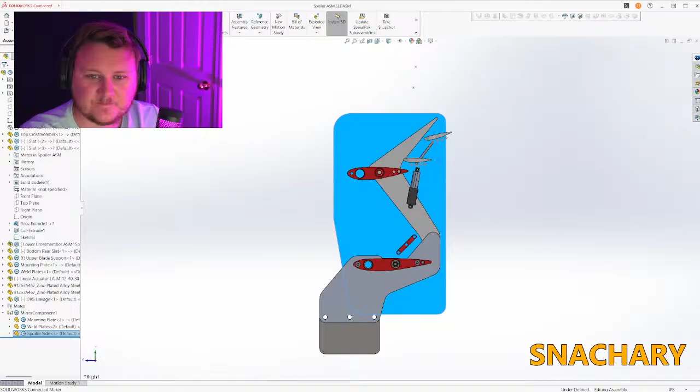Our goal here is to lift and lower these two rear airfoils with this actuator. So over a certain speed they will lay flat, reducing the amount of drag that the spoiler actually puts on the vehicle so that it can...

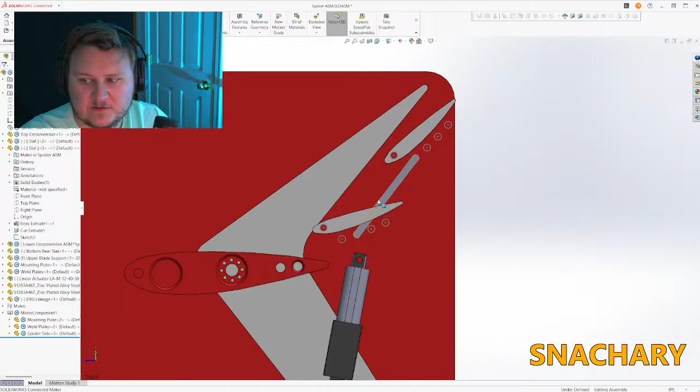So what I'm going to actually do for the real one is replace this with a turnbuckle.

Let's just look real quick. How much would one of those cost? Maybe not a turnbuckle, but actually a turnbuckle might work.

So we're asking this to be 2.5 inches long, clevis to clevis. Oh, the smallest they have is like 8 inches retracted length. Yeah, the one they have is 3 and 3/8.

So we'll just keep working as if that is a turnbuckle. Okay.

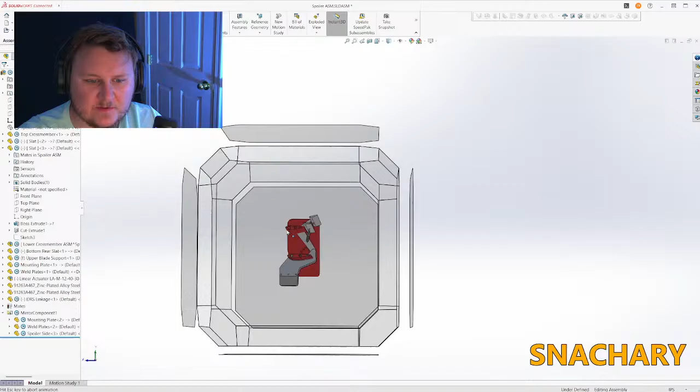So we need to build a tab off of this boomerang piece that will hold this pivot point. We already have the sketch started there with these 2 points, so we'll just convert this.

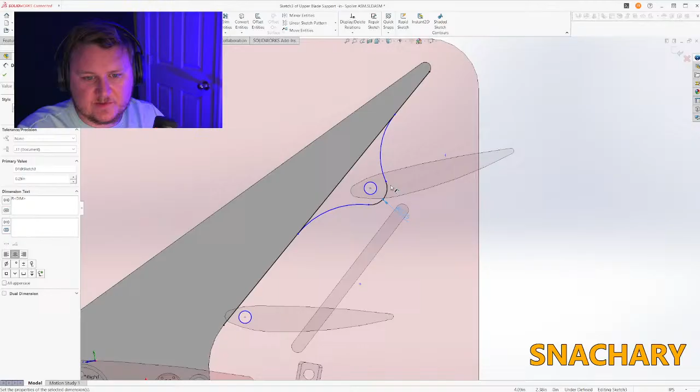We want to fix this one in space, because otherwise it'll move around. So I like that at 0.25. That's pretty good. I do like that at about 1. Don't see why not, we'll make those equal.

And then this pivot point we decided is a 10-32 clearance, which is 195, I believe. Yeah, I think so. Or 191.

Let's add our fillets here. So we're just building up around the pivot point. We're using a lot of the geometry that's already there.

Let's see if we can't just tag that into that. We'll fix this point here too. Since we're already using that, we'll make these 2 hole sizes equal.

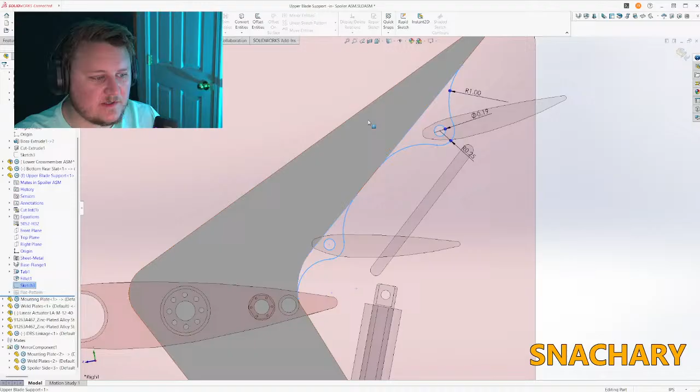Okay, and then we got to go in here and trim parts that are not tabs. So then we can X out of here. We can select this sketch, select the base flange sketch or feature, and it will convert those to tabs.

So boom, we've got a couple of tabs now that our flaps will pivot on. Oh gosh, that's so cool. That is so cool to me.

So obviously we're going to need to add some notches and such, so that these don't interfere. That one's pretty major up at the top. If we cut that much out of it, I guess it'd just be the top side of it, right? Yeah, I guess it would.

One thing, if I get the top 2 pivoting correctly and that all looks good, I might try to tie this bottom one into it as well. So if that were to be the case, the actuator might move.

But for right now, look, I've got the actuator right here. It's tiny, you know, that's nothing. That cross section is not going to end the race. So...

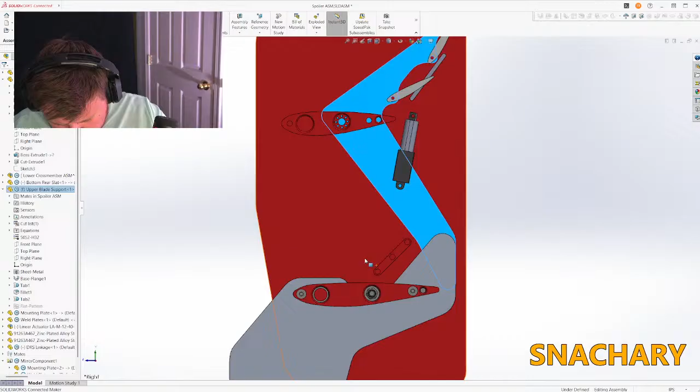It's pretty good, pretty strong. But for now let's keep it simple with the top one. Let's go ahead and build a brace for mounting these two things together. That'll be easy.

So what's the distance between those? 6 inches. I guess we could use more of that 5/16 rod, we're gonna have extra. I think I had to buy 6 footers and I only need 40 inches. So let's do a hole.

Sorry, we are mixing metric and standard hardware. It's just what we do here in the United States. I happen to have a lot of M6, but the hardware store doesn't have metric hardware on hand, and what they do have is way overpriced. Ordering small quantities of metric hardware is ridiculously cost prohibitive, so we get to use what we have in the shop and what the hardware store has.

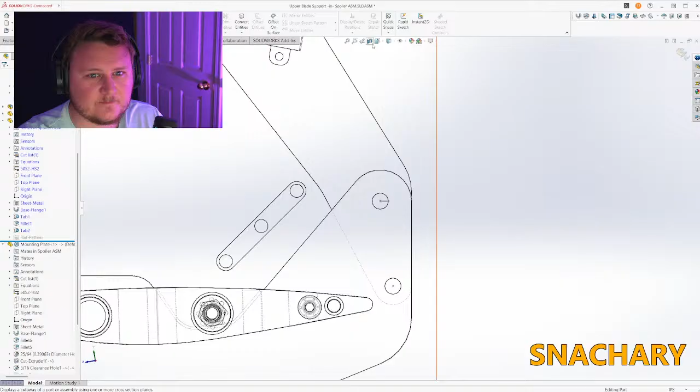We'll throw the same holes in there. And what are we going to call this? The upper blade support.

Yeah, buddy. So now we just need to build some tubes. That's what we need. Just keep it simple. We need to keep rolling. That is exactly 3 inches.

Oh, we've got the clearance for the 5/16 already. We can just steal it from this part.

Last night I watched Mickey 17, which I was really looking forward to based on the trailers, and the movie itself was kind of garbage, which was very disappointing. So I don't know what you guys are doing out there, Hollywood, but if you could be nicer, make better movies, I would appreciate it. Really disappointed.

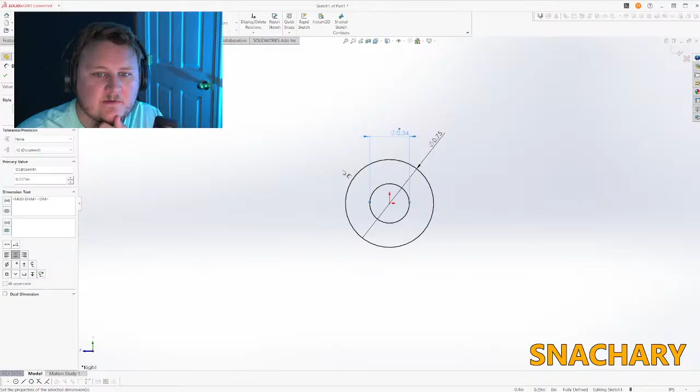You know what I need? This should be a plug, and then we should put the aluminum tube over it. That would be dope. So, give me 1 second.

Okay, so what we're gonna do is... oh shoot, this always happens. We're gonna take the inner diameter of this, which is supposed to be 5/8, but these tubes have been rather inconsistent. So if we do 0.625 minus 0.00125, then make this 3 inches long.

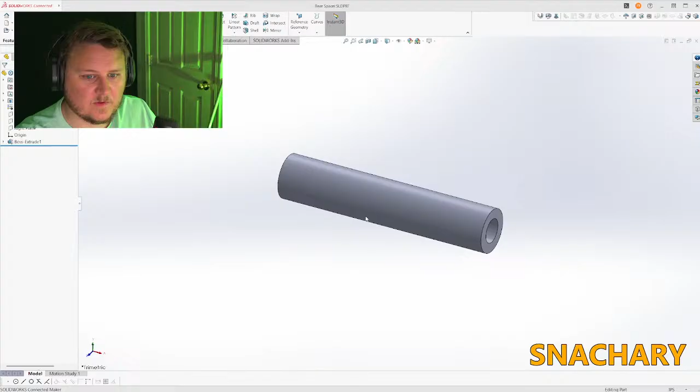This is the spacer for the rear. We'll take the mid plane of this, mate it to these two surfaces.

We don't need this to be rotating, so we'll copy with mates. We will repeat the symmetric mate, and then the concentric mate will be here. Dunzo. We will hop down into the bottom and add these to our mirror feature, and now we've got a nifty little spacer.

And we need to steal this tube. Is the inside of this actually 5/8? Yeah, it looks like it could be. So we'll do a configuration of this where it's shorter. Just distracting? This might be distracting.

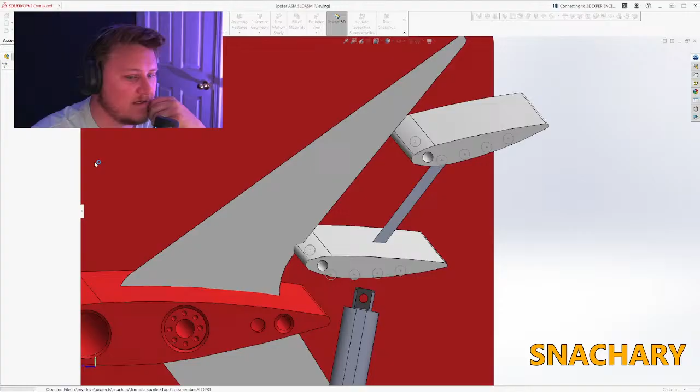So the rear spacer part worked. Let's see if the whole assembly got glitched out. Okay, so this should update with holes in it. I want holes in this part, and I want the tabs that the upper parts are pivoting on, and they didn't go.

We lost a lot of progress on our... Let's see. Okay. Is it gonna work? She's thinking. Come on. Oh, it worked. It worked. Okay, I gotta grab something else real quick.

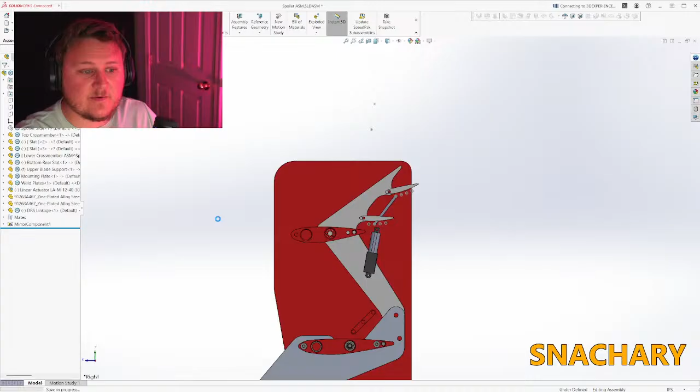Guys, I am not a fan of all the licensing bullcrap that SolidWorks has you go through nowadays. I understand people misuse SolidWorks, I'll admit that when software is hard to acquire or expensive, you mess around a little with freeware versions of things, but honestly, I'm paying a subscription for SolidWorks and it doesn't work so often. It's really frustrating.

I tried Onshape too, because it's browser based and all that stuff, and it really did seem like it was going to work better for me, but I used SolidWorks professionally for 8 years, and before that unprofessionally. In those 8 years I got really good at it, I'd say. Then I didn't use it for about 2 years, so I wouldn't say we're at my peak SolidWorks performance right now.

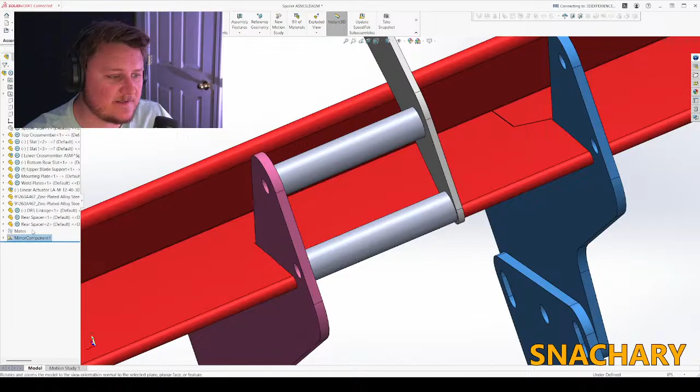But I tried to switch CAD programs because with Onshape I could access it anywhere, I didn't have to have my computer, and I just couldn't learn it fast enough, and it was really frustrating. So if SolidWorks keeps giving me grief, I may try Onshape again, because when I used it, I could tell the bones of it are pretty similar to SolidWorks.

But the constant crashes and the stupid login, and whatever 3DEXPERIENCE, the online version of it is just so stupid and annoying. It doesn't work like real SolidWorks. That has got me about ready to bail.

But I have a lot of projects that I just need CAD for, and I already know SolidWorks, so it's really hard for me to justify learning a new CAD software when I just need it to work right now. So, okay, what we're doing now, sorry, that was a lot of complaining.

These braces are going to be 3D printed. We'll make these out of plastic. So let's just set that to, I guess we'll set it to ABS. No, I don't want it clear. We're going to edit the material here, plastics, and we're going to do PETG, PE, high density, low density. We'll do that. Perfect, and it's even the right color.

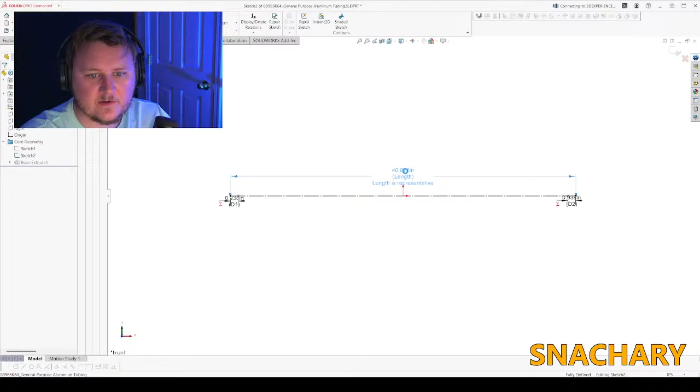So we're going to use this as a spacer within the tube here. What I've just done is borrowed the aluminum tube out of the brace, and we made a configuration. We're going to call it rear brace, and go down into the core geometry, for a specific configuration. OBS doesn't show all the little windows that pop up with SolidWorks, but we're going to change this dimension to 3 inches for only this configuration.

And then we can take our tube, bring it in. We can change it to the rear brace configuration, and it'll be shorter, but we don't have to redraw the whole thing. So we'll make it concentric with this. We'll make the right plane coincident with the other right plane.

And lock that rotation down. And we'll copy this with the mates. We will repeat— no, we don't want to repeat any of those mates. So we'll do that. And then we want the right plane off the spacer. And we are good to go.

So now we can thread a bolt all the way through this. We'll have a plastic spacer, but there'll be no exposed plastic. These will be aluminum bars on the back. I think that'll look really nice. And like I said, a lot of this is aesthetics. We're trying to make something look cool just as much as we're making it functional.

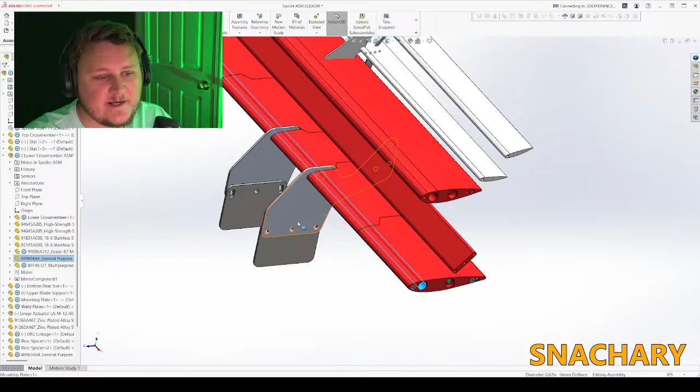So if you weren't here last time, we've already finished the bottom, made it into an assembly. I've printed this out already actually, and test fit it with the tubes and the threaded rod in PLA, and that's working really well. I am going to use PETG carbon fiber to print the final version, and I need to do some test prints with that. But until that happens...

What in the world? Is this not centered? How is this mounted? Oh, it's fixed, oops. So we don't actually have a right plane mate on that. That makes sense.

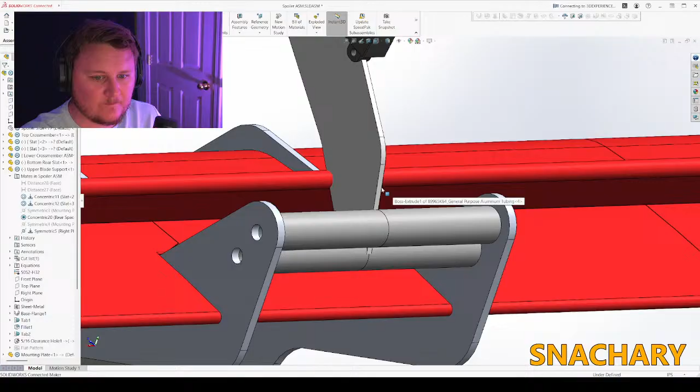So what are we mad about? Well, just watch me explode my entire assembly as I try to add mates to it. Apparently it's angry. I have made a mistake.

Let's see if we can make these. Okay, perfect. That should shore some things up.

Our spacers are no longer going to be 3 inches, they're going to be 2.9375. Is that 2 15/16? Yeah, it is. I know fractions. God bless America and the imperial measuring system.

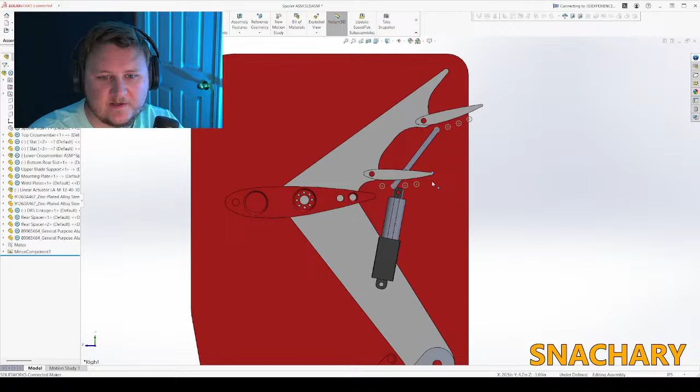I needed to make these parts work. Little quick win there, something that had to happen so that we could get it finished.

Okay, I think that looks pretty sick. Let's change the mate on this bolt here, because I don't like that it is within the other part here.

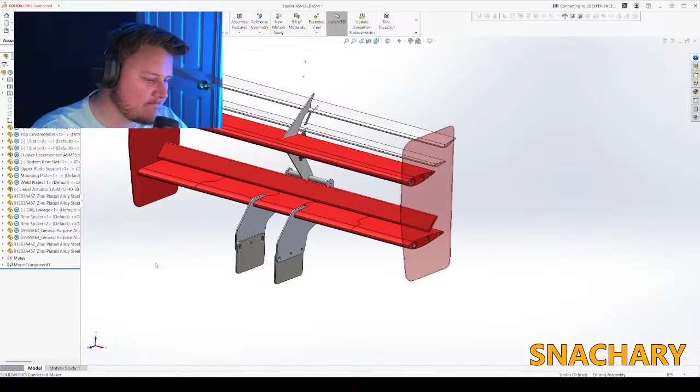We'll work on that later. So...

Let's add a hole for this one to pivot. We don't have any of the holes for the...

I don't want to add holes to the side plates just yet, because those holes will keep moving around. They'll change levels of the assembly and stuff, and it could just cause a crash, which SolidWorks is already really good at.

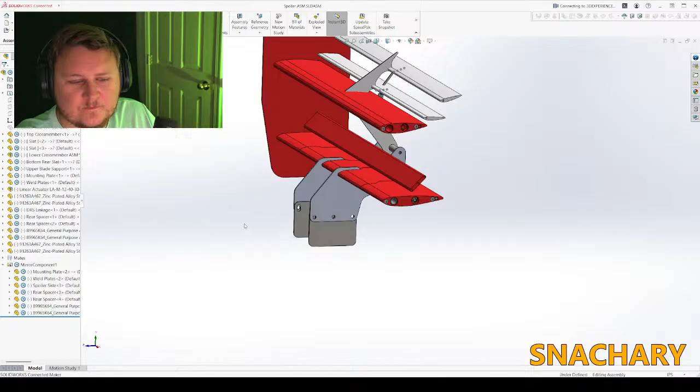Okay, what are we looking at? We got these nice spacers here. So this is bolted to the chassis. These things are coming up. They're spaced apart by the wing itself and these tubular members, which is dope. Then this is held in place.

I guess we could start working on how this interfaces with that. I am so tempted to just make these two pieces slide together in front of that, but I think it would be more beneficial if this was solid across there, so it didn't have a center seam, you know what I mean?

So if we look at this, we need, ooh, why is that moving? Whoa.

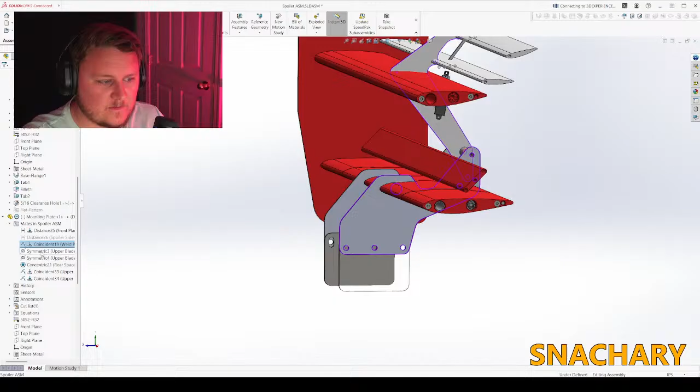So why is this moving, and how can we constrain it better? Why isn't this fully constrained? It's not constrained to this.

And the weld plate, what did I not do right here? Can I fix the weld plate in place? Oh my gosh, things that were working just a minute ago have stopped working.

But anyway, so we got this going on. We need to make this actuator into an assembly. Oh, it is an assembly. Did he already make it? Oh, it just spins. That's not what I want.

We're gonna take the actuator here and apply some limits to it so that we can properly simulate the motion of the DRS flaps.

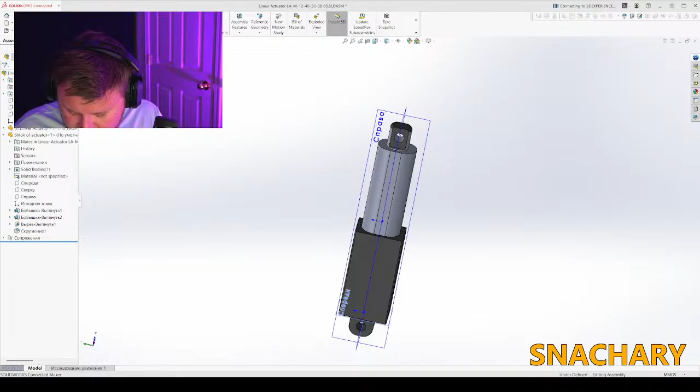So I'm looking up the specs on the actuator real quick, and the one that I got is retracted length 85mm, extended length 115mm. Okay, so let's go ahead and add those dimensions to our model here.

So she thinks that she's fully... oops, we want to make that a mechanical mate. Not a mechanical mate, a limit mate.

So we'll have 81, let's pull up a calculator. So that'd be 115 minus 85 is 30, plus 81.9 is 111.9. Messed that all the way up.

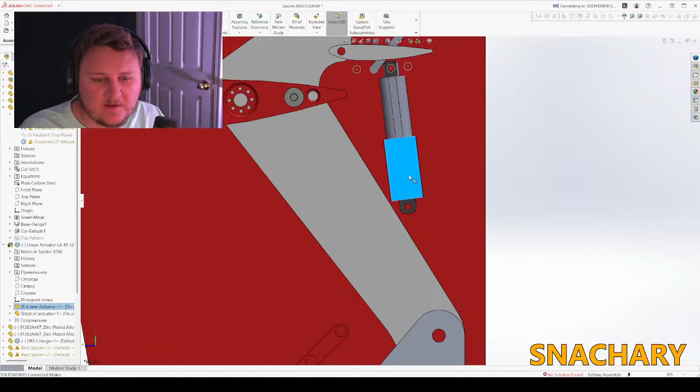So we need to move... we could almost just do something like that. Watch, just for the sake of making this go a little bit quicker. Where's my actuator? The actuator came with some like clevis pieces, but we'll figure that out in a second.

And if we hop into our boomerang section here, we go to that tab that we added. This tab. We can add whatever that's going to be.

We'll do a tangent arc off of this, a tangent arc off that, a tangent arc this way. Make those concentric, and then we'll make these equal to the other ones. Keeps picking up that point instead of the line.

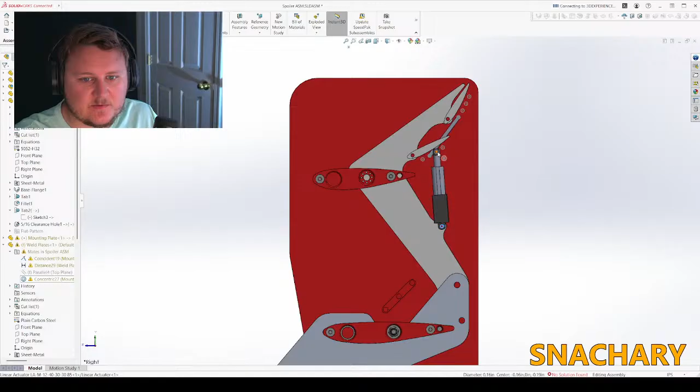So what is the distance between these two holes? Earlier when I was trying to measure stuff, I kept hitting the wrong things, and that's why none of that was being very happy. 3.9 inches, which is...

So I wonder if we move that from this one. What if we move it up to this one? Yeah, and so what that's going to do is give the actuator a little bit more chance because it's got a longer lever arm.

Yeah, buddy, it's looking pretty good. I guess we'll make a cool little fairing for it, but honestly, it's just so small. Do we even care?

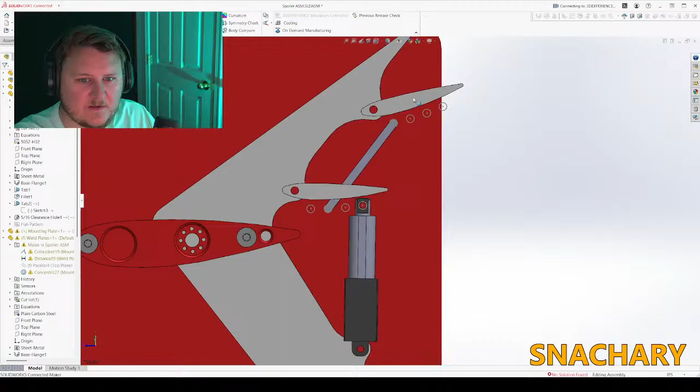This one needs to come down further, which is just some geometry tweaks. But we're getting a lot of the big bugs worked out.

We need to fix some mates, so bear with me, we're gonna do some exploratory surgery. So this plate is allowed to move up and down, which is not something we want.

So is this the mate that we need? So that guy's fixed now, that guy's fixed now, but the top cross member is not happy.

So why is that? This distance, it's all angry, suppressed face. Oh shoot, I know what happened. I suppressed the slat instead of just changing the opacity. My bad.

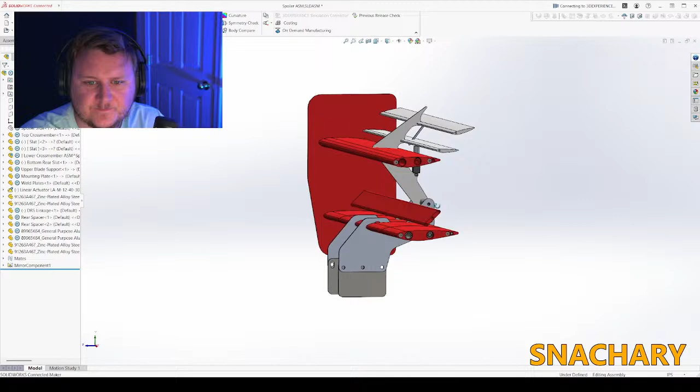Okay. Everything went back to normal there. Yes, yeah, okay. So cool, so cool.

So when you're just cruising around the track, nice and slow, hang on, does that not move up as much as it used to? No, I think that's right. And then you hit the gas, wide open throttle, and the air just goes right through it. Beautiful.

We need to actually figure out this linkage, I think, that's bothering me. So, if I'm thinking correctly, we're complete here. This piece is complete, this lower assembly is complete. So we've got more done than not done.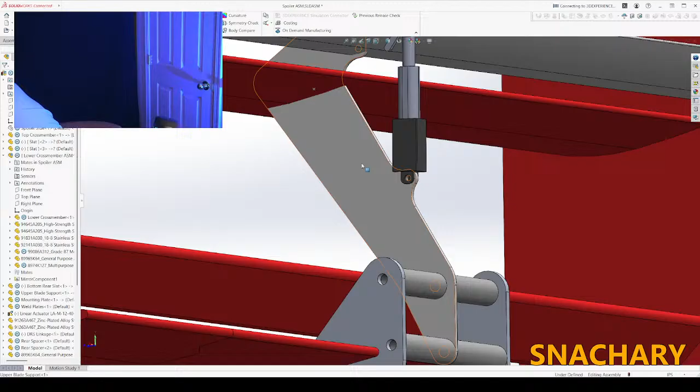Okay, so the actuator came with little brackets like this, which would let you mount it to the surface of things. So on the top, on the spoiler there, that might actually be pretty useful, except I would just print that into the part as a feature. On the bottom, we're gonna have to come up with something different.

So do we make a mount for that now? Is that where we're at? Or do we just put it off to the side? No, that's lazy. So let's build a mount for the actuator.

And what I have in mind is an H shape. So we'll have the thickness of the upright, and the thickness of the actuator.

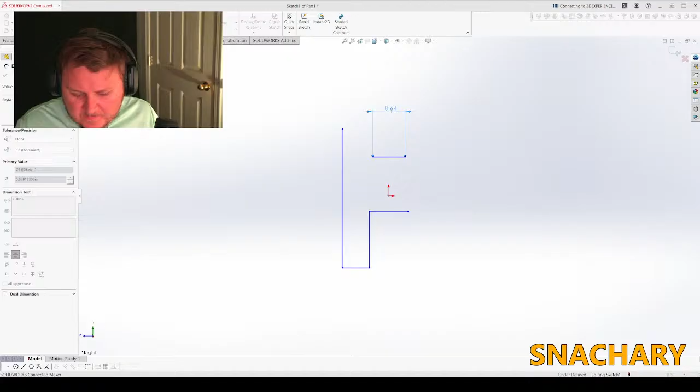So the thickness of the actuator is 0.31, and I know that the upright is 0.125, eighth of an inch.

This doesn't need to be as thick, so we can turn off the vertical alignment there. We will make these equal to each other, and then, I don't like the way that that looks. We'll go like this. We'll make these equal to each other too.

The actuator is 34, so we'll just do 0.375. How much engagement do we want on the, do half an inch there maybe? Okay, seems reasonable. There really doesn't need to be a big gap between there, so let's just make that, I like 1875.

Let's just make the center of it the center of the part. Boom, everything's black. We will use the front plane. I guess we could have used that construction line. We'll mirror that over, and then we'll extrude that for what feels right.

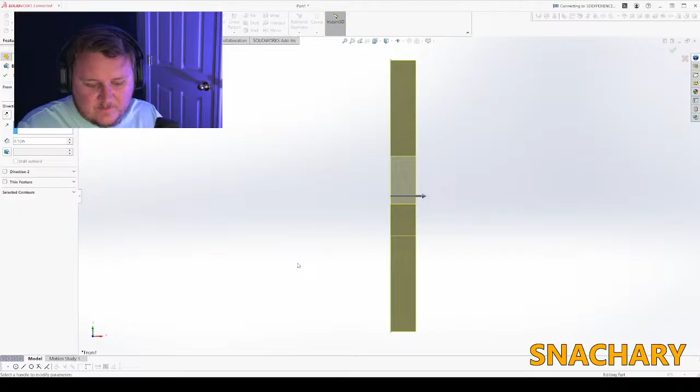1.5 inches to the midplane. Then we'll turn on our see-through settings. We're gonna do a right plane cut. We're gonna draw out. Wait, hang on, do I care about that right now?

You know what, let's just leave that. We will leave some adjustment in this. So we'll do this as the actuator mount. And then we can add some fillets.

Actually, they need to be chamfers because of printing. So we'll drop that down to an 1/8. How's that look? Does that look okay? Let's give it some more. 250 seems reasonable. We'll fillet these top edges, because I envision this part printing on the end.

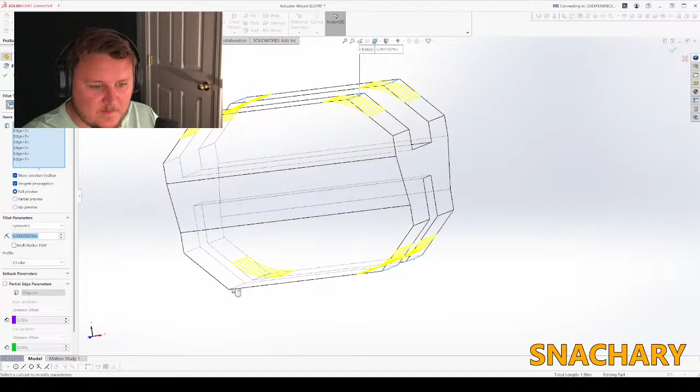So that there's no overhangs. Dylan, I'm trying to make it easy on you. I don't think he has a 3D printer or has used one. Maybe he has.

So that's not too bad. It'll print like this, vertical. And that way the overhang here is as minimal as possible. And we can add some holes in this.

And the hole in the actuator is 0.16. I don't know what 0.16 is. Oh, did I have the actuator pulled up still? I think I did, let's look. There's usually a really detailed spec sheet.

But this time there's not. What we're gonna do is linear pattern that 3 times. We'll make the center one even with the top here, then spread them out. We'll make a safety zone with this construction geometry.

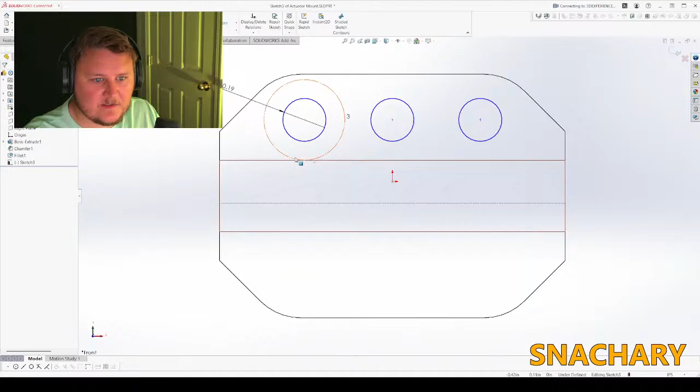Set the height on that. So the safety area, 3, 4 - I think it's dead center actually. We'll see in practice. Because if it's centered, all we gotta do is one of these.

Make that a construction. Let's make this even with the edge of that. And on the bottom side here, we will use 2 screws to attach it. We'll just use the same number 10s that we have been using.

We're here, and here, and here, and here, and here, and there. Does it seem right?

Okay, kind of chunky, might need to adjust that a little bit. But what that lets us do, we're gonna actually go back into this tab feature and delete it.

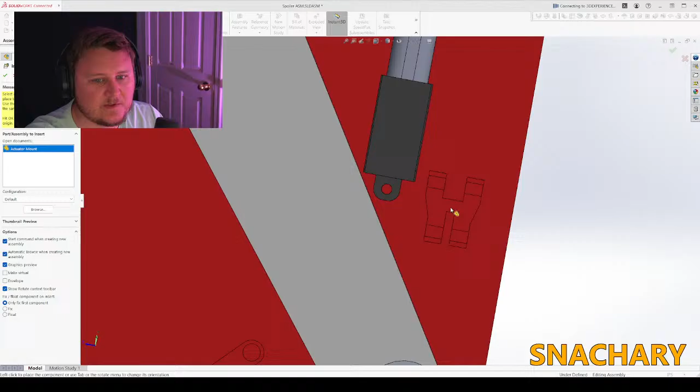We're gonna insert our actuator mount here. We can right plane mate that - well, I guess it's the front plane in this part to the right plane. We should center it up. We will use the top edge of this channel to mount to the plate.

Dope. And... okay, this is changing my plan a little bit, but not too bad.

Make these 2 things concentric. We tell this to be a certain distance from - let's just use this point right here. What do we want that to be? 2.5?

Alrighty, so let's go back in and change this. I'm not a big fan of the way that that turned out. So...

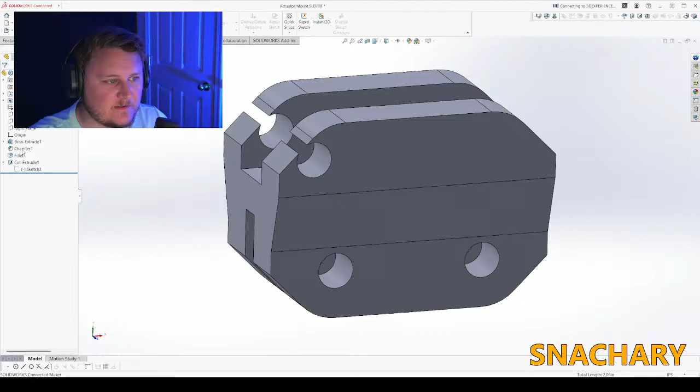We're just gonna do it... this, and this will make sense in just a moment. We are not going to chamfer, we're not going to chamfer anything. We're going to do a profile cut from the side.

So these boys are... we could do the same thing. I guess if they have the same size hole, they can just be vertical to each other, right?

This to the bottom edge there. Okay, then we'll use a right plane or front plane cut.

I'll go ahead and make that concentric to that guy, tangent to these guys, and that will cut that front lip off, going all the way down to the very edge. We'll put that in there.

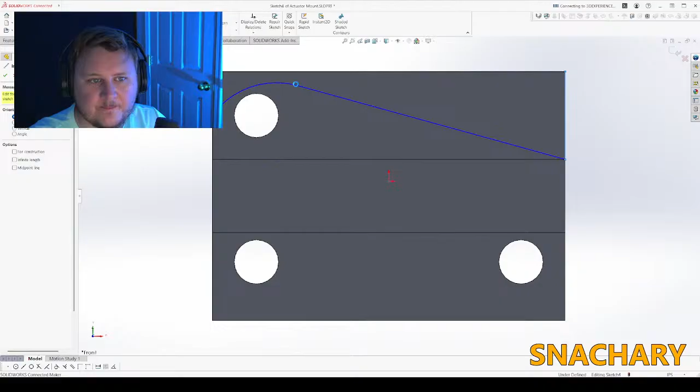We'll get rid of that actually, we'll make that come to the very edge. Okay, so that'll cut all that off.

And from the bottom side, we want something similar, but we need to start it with a chamfer. So make those tangent, make that concentric.

While I'm doing this, I'm thinking about overhangs for prints. We want 30 degrees or less overhang, and the closer we can get to 30, the prettier things look to me.

So we just have that. Why do... because 30 degrees, or the chamfer will ensure that there's no - man, what does he keep doing that for?

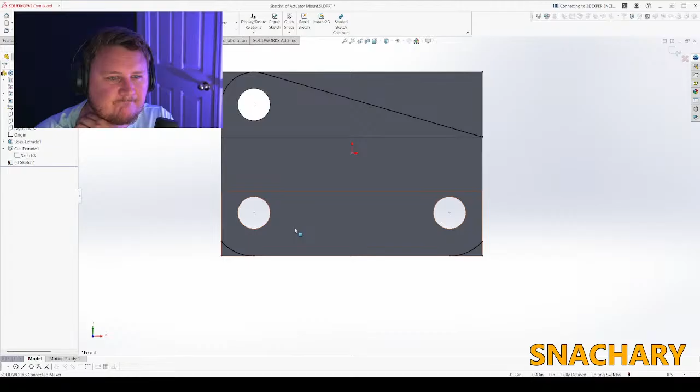It's because these holes are not in the same place.

Okay, and then it didn't like this being one line, because then there's two profile, or it's two areas with one profile. Boom, there we go, that's what I want.

Now, unfortunately, we got to redo all this. But it will do what I said initially. We have to...

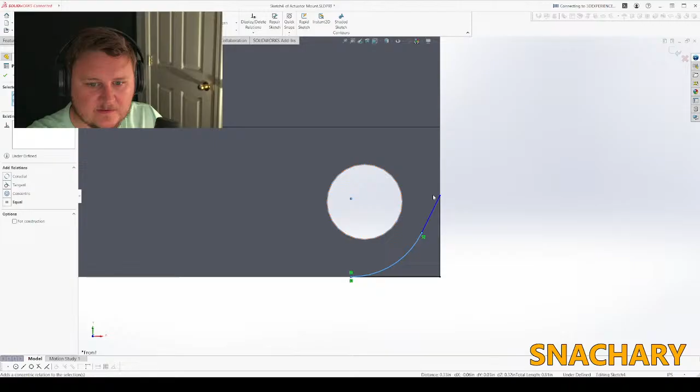So then we come into our flat section and we make it our 30 degrees. And now when this part prints on its end, the first little part of this fillet is going to be flat, unfortunately, but it will be consistent. It won't have ugly squigglies.

So then we take a look back at our nice... We're gonna suppress that, that's fine. We're gonna flip this one. We're gonna unsuppress that. We're going to flip that one. Then we're going to mount this to this hole, and that's it.

What a mess. Okay, so does this still work? Yes, but it's too far up, so we need to move this down just a hair. So, 2 point...

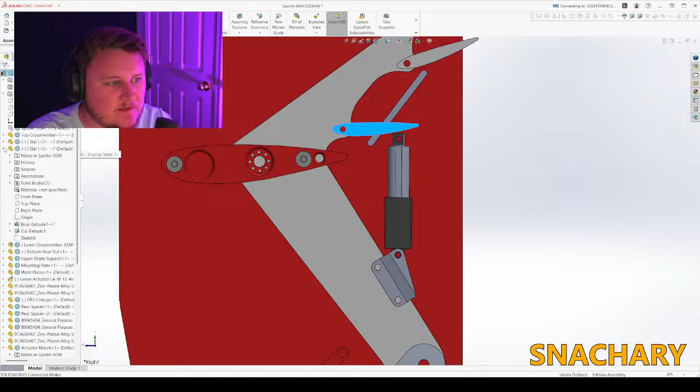So when that's all the way retracted, what is the top plane? Still not flat, so we need to move it down some more.

Top plane of that is... evaluate measure, should be parallel. Yeah, and it is. So this actuator now pushes this bottom one in an arc, and the top plane to the top plane there is 27 degrees. So did we max out our actuator?

Is that what's stopping us? No, we're hitting the max of this guy. So if we suppress some mates on the linkage, just one, we should get our full 30 degrees out of that.

So I'm gonna call that design accomplished on the geometry between the actuator and the lower dealy bopper here. Love it, beautiful. So this is moving. That's fine. This needs to move, and we need to figure that out.

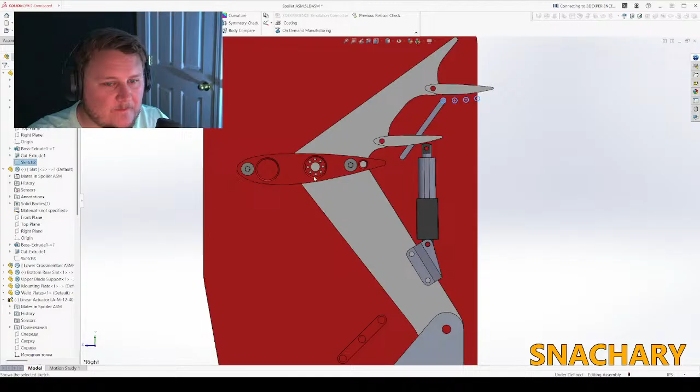So if we pull that down and we push it up, let's use a different hole. Let's try this one or this one.

Center to center is 2 1/8. So we don't even need the actuator. Let's just mate those. Distance wise.

Perfect. So when this goes up, that goes up. Oh my gosh, it's so close. Is that close enough? Is that close enough that we just don't care?

Do we get our 30 out of this one? I think we do. We get the full 30 out of the bottom one, right? Yeah, we do. Oh my goodness, that's so close.

And then this one, what are we at? 53, we're missing 7 degrees. What can we do?

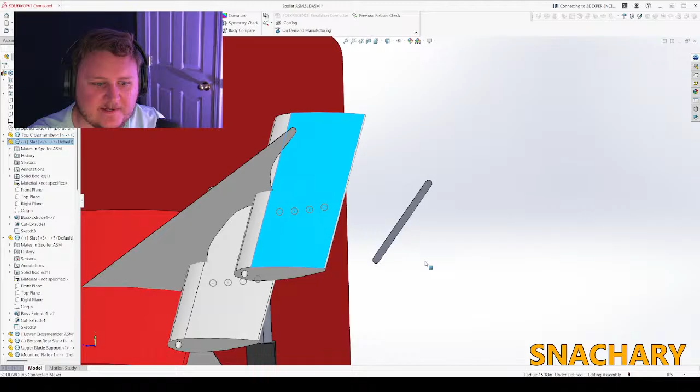Man, it looks so good. I say we just go with that, to be honest. So what did we say that was? 2.125.

So we have this hole to this hole. Hope that doesn't cause any problems. We'll have to check that out in a sec.

And let's get rid of that distance there. We'll get this one and this one mated up.

Yeah, that's pretty dope. I think we're gonna leave that. But what I want to try, just for giggles and shits, I want to see what happens if we move this closer.

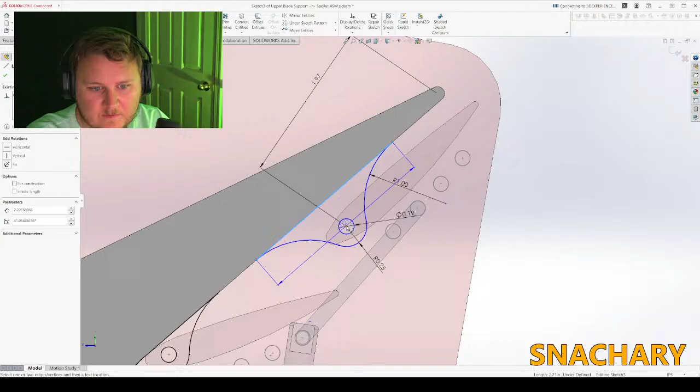That wasn't that much closer.

How long have we been doing this? An hour and a half? Let's go 30 minutes more. I got 30 minutes.

I think we should not have this actuated on the same pivot. We should have it pushed off the top. That might help us out a little bit.

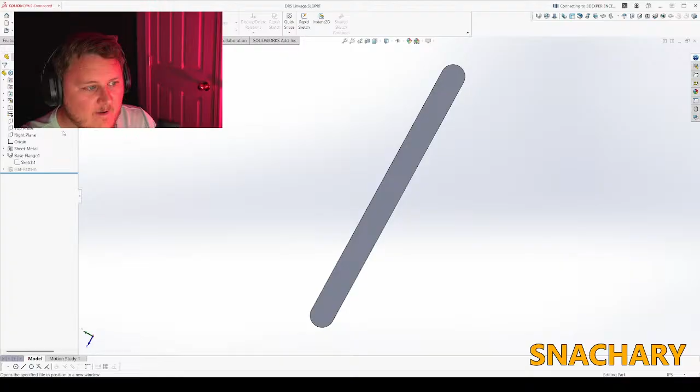So if we measure the distance between those two holes, we get 1.5 inches, which works for me. This is gonna break something because I didn't unmate it originally.

She's not happy. Come in here, we delete that mate there. We put her up to this one. And now, oof, that didn't work. Didn't work good.

We need it to move some more, so what's the distance between that hole and the upper one? 1.16.

Take it out of this hole. I know we just had it figured out, but this is gonna be better. That way. Okay.

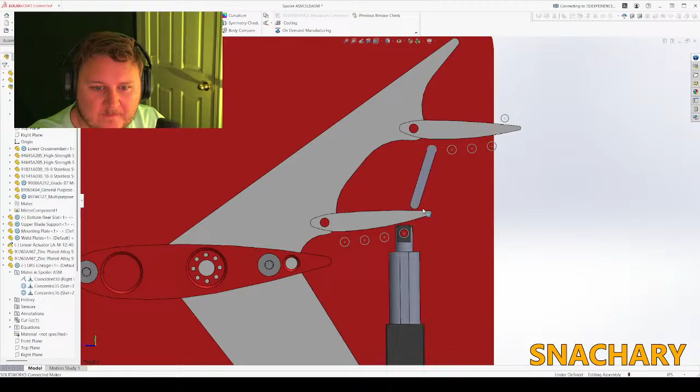So first of all, we've still got to... we're gonna have to break that linear pattern in that sketch. We're gonna delete all—oh no, we're not gonna delete all the rest of the holes.

We need this to be a little bit further down. And back. And we can at least remove that one because we know we're not using it.

Get this bottom part figured out.

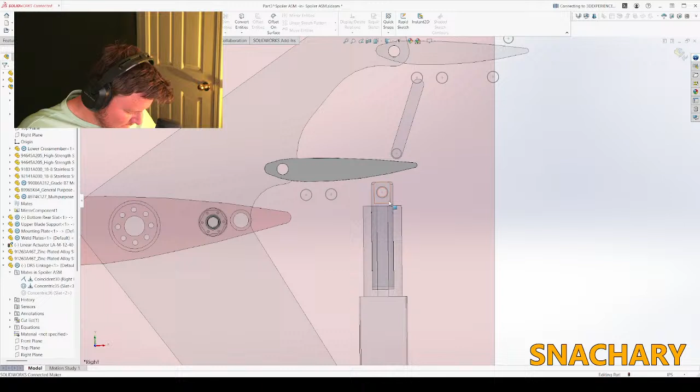Back's starting to hurt. That's when you know it's time to get off the computer.

We got our two geometries in there. We'll open up that part.

This other geometry is for giving us clearance for the pivot. We want some of this, we want it to come up to there.

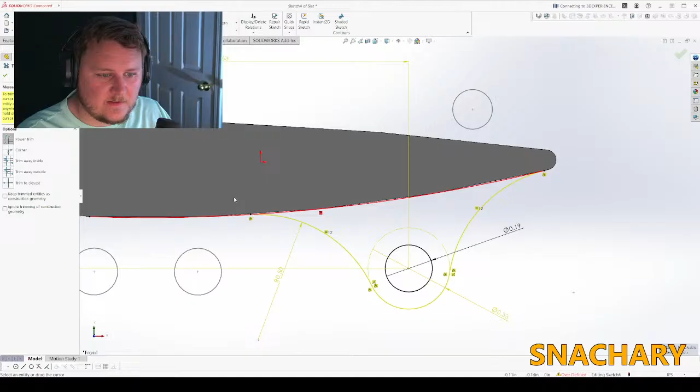I'll trim the end of the situation here. Apparently it doesn't want to be equal. Guess that's fine now, I didn't like it before. Maybe it doesn't want to be equal—what is that all about? Just leave it at 0.5. That's weird.

We're gonna extrude this guy, and we're gonna do offset from the mid plane.

What's a good thickness for that so it doesn't break off? Our good old 3/16. We're gonna mirror that across to the other side.

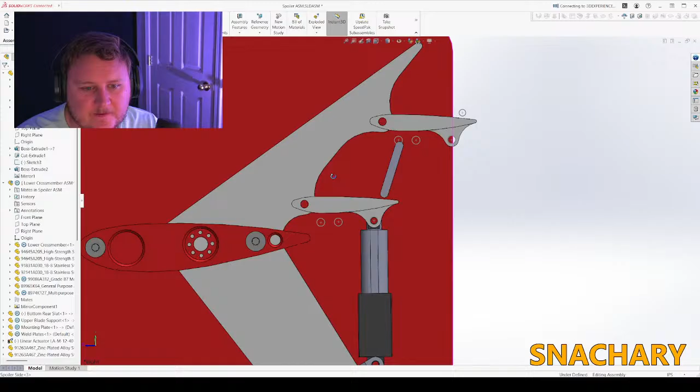So the goal now is to figure out how to move this upper section here without messing around with this too much. When this is up, and this is up, let's try this hole to this one.

Oh, that's not that bad. Okay, well in that case, which one did we use? The front one, inch 1.27.

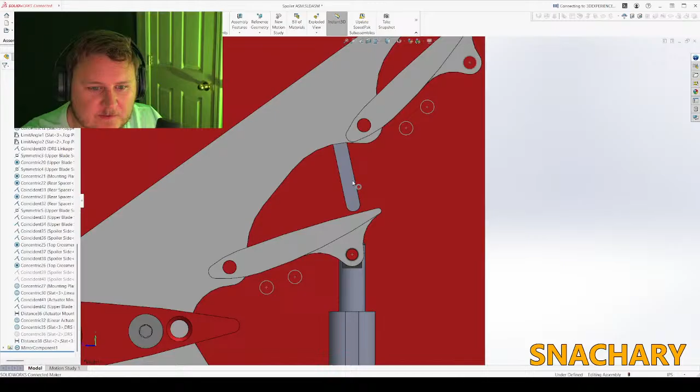So then we can undo that suppression of that mate. We can get rid of that distance.

That's pretty weird, I don't like that a lot, actually. Again, we've got that problem where it feels like it's going over center. Right there, it goes over center, and that's not good. We don't want that.

So one way to prevent that is to move this point further backwards. So we can start to—let's just dimension this.

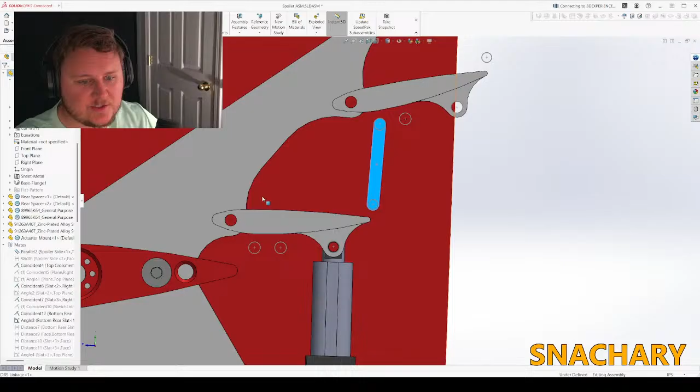You know what? I don't think that linkage should be aluminum anymore. I think we could do a little H bracket for that too. I have a good idea for that.

So this one flat and that one flat, we mate these distances. And now it just moves straight up, and it goes the entire way.

But do we get our full range out of this one? I don't think so, that doesn't look right. So it's moving too much.

So let's try the rear one—or did we already do the rear one? It's about time for some eye medicine. Oh, we didn't do the rear one, let's try the rear one.

So with that flat and with that flat, we're going to try that, and now this moves up.

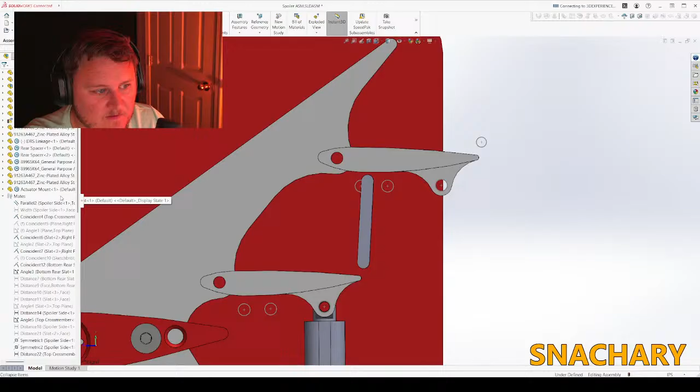They can't get to 2 1/8 in the current situation. Is that because—why is that? This thing not flat? That thing's not flat.

So do we move this down a hair? You know what, it is so close. It is so close, we're gonna call it.

How long is this thing? How is that? Oh shoot, I did it again, I made it the wrong things. Crap.

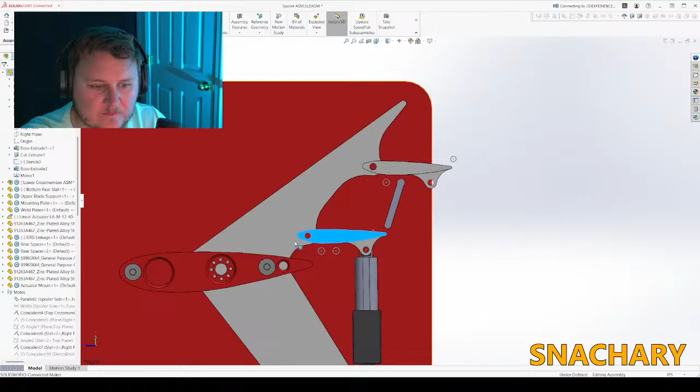We need to mate—this thing's messed me up. We need to mate from this one to this one. We're not very well using this hole.

That works, okay, so we come in here. What's the only one without—we add some real dimensions to this.

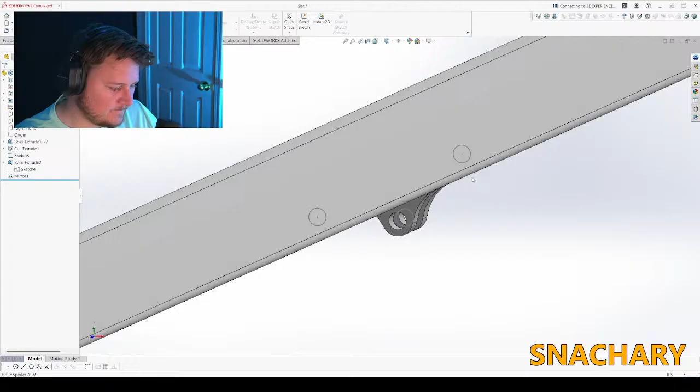And then, so this is the lower one, so we want to make—do I want to make essentially the same tabs, top and bottom on this piece? Would that make printing it easier?

We're gonna have to split this kind of right down the middle. Yeah, I think making this one have the female bracketry is gonna make our lives easier.

So we'll convert this entity, we will convert this entity, we will add an arc around that, we'll make them concentric, we will add equals to that. Oh my gosh, why is it so mad about everything? It's just mad.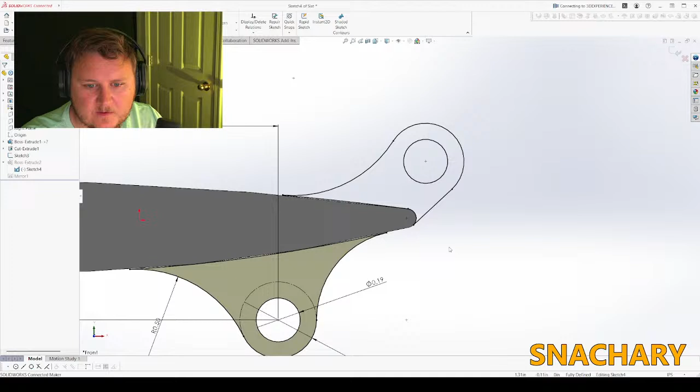Okay, so we've got this all set up. This will be our lower DRS flap configuration. We will add a configuration to an upper DRS flap.

We will suppress this extrusion, and we need to pick up this point. We can show the sketch though. We need to pick up this point in our upper situation.

We will add an arc, we'll make it concentric to this. Whoa.

I'm losing my eyes, it is going to be time to put this up for the night.

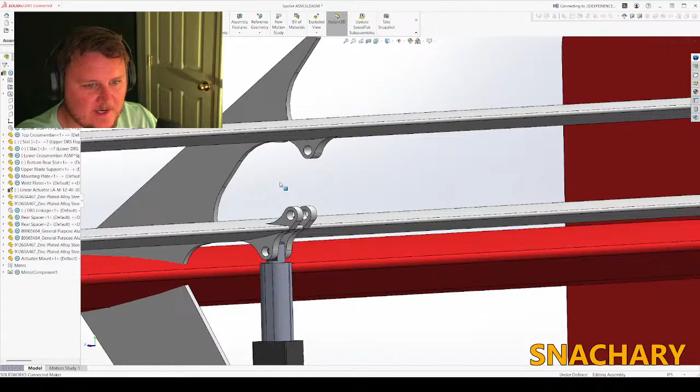Oh no, let me show you from the back. What is this distance? 25, we use 25 here. So we come back into our actuator linkage, right? Oops, give me one sec. We're going to check the distance here, which is 625.

So we're not going to do a base flange anymore. We are not going to do sheet metal anymore. We are going to use this sketch to make an H-bar linkage. So that is 625. Boom.

Then we want to remove on the top. We want to remove the middle, for I don't know, that much. No, that's the wrong thing, we're not doing the right thing here.

We need to invert that. We're just gonna delete all that. Boom, we're gonna go like this. Bring this up to here, and do that.

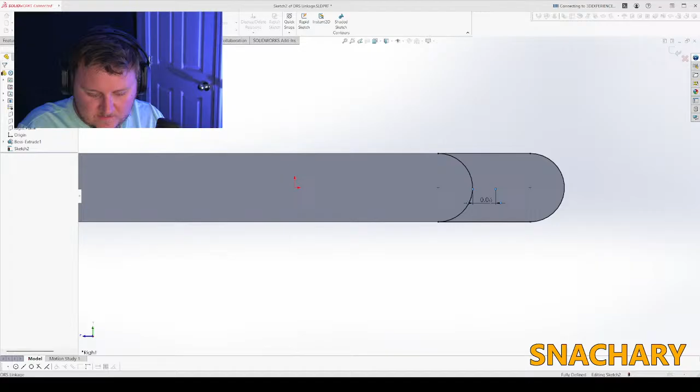And then we can make that something like that. We do an extrude cut from the mid plane, 0.25 plus 0.0125. Then on the bottom side we kind of do

the exact opposite, right? So, wait, we can do it from here. We convert all these entities, we mirror them across, we make these for construction only.

Now we take this, we go offset 0.125 and then through all the other way, and we take that and the right plane, mirror that dude, and we have our little H-bar linkage.

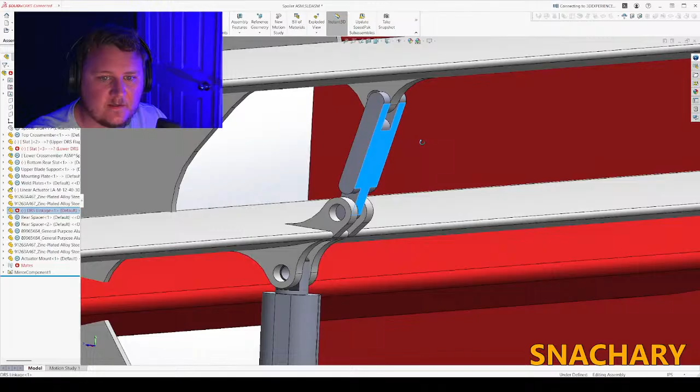So we need to clean this up for 3D printing. That is not a suitable 3D printing part, but check that out, pretty freaking slick, man. So we come in here. Oops, not that face, not that face please. This face, please.

Man, whoever just hopped off the stream, you're missing the best part. We are about to kill this thing. It's looking so sick.

.27. How long did we make this? Boom. Yeah buddy, that's awesome, oh yeah.

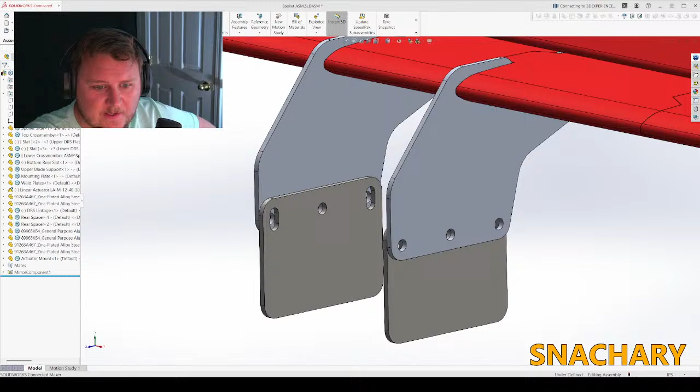Okay, all right, so walking through this real quick. These plates weld to the chassis, and they're steel, so that should be pretty easy. Then we have one bolt right through the middle, so the entire wing can rock back and forth just enough

to level it out with these slots. These go up through the lower assembly, which has an aluminum tube. It's compressed by a threaded rod on both sides and a flat solid rod on the back that keys together, so it makes it really rigid. There isn't any racking in the test print, which is great.

We have countersunk bolts that meet with nuts that are inside, so the assembly is really streamlined and flush. This lower cross member here, I haven't made it adjustable yet, but this one will be adjustable on the outside with a half moon. The upper cross member here will have the same features as the lower one, with the aluminum tube, the threaded rod, and the bolts.

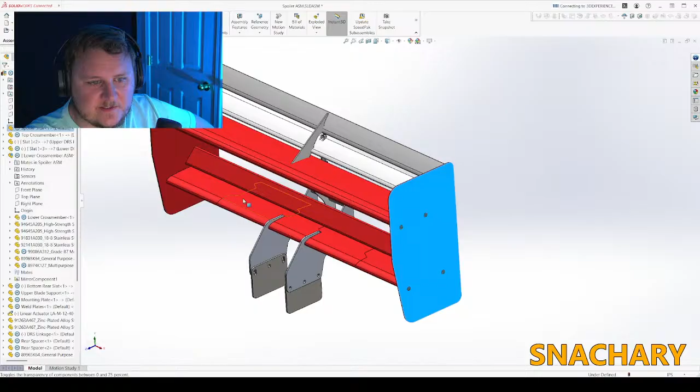It'll be split just like this one is, so that it can be printed. These are going to be aluminum plates, 1/4 inch, that I'll send off for and have laser cut from SendCutSend. They are sandwiched in with this bottom cross member, and then another short section of aluminum tube with a 3D printed spacer in it, which will make for a pretty strong

H-bridge type of construction to hold the center beam here, which will stabilize the center of the top cross member as the bars pass through it as well. Then we've got our DRS system, which is this actuator I've already got on hand. At a certain speed, we could do it with GPS, or we could do it with a button. I already have the stuff to do the GPS if that's what you want to do. Then it would just work off speed. It'll pull down and flatten these guys out.

And then when it extends again, you've got your full drag situation going on. So I'm really proud of the way it's coming out.

If you're liking this project, let me know. If we want to do something a little bit different, or if there's a piece you're not in love with, give me a shout and we'll change it up. But as far as design goes, all the hard parts are done.

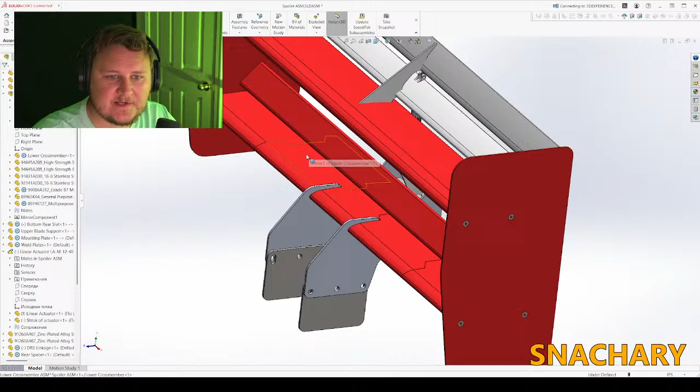I proved out the concept that we can print something like this on the bottom here, and I just need to spend a day copying these types of features to all the other long members so they can fit on the Bambu printers. Obviously add some clearances where we need them, and then I want to put together a full bill of materials so I can make a drawing package, so when it arrives you guys can put it together like a Lego kit, step by step with no guesswork.

But anyway, sorry this is taking so long. I saw you guys are at Slush Fest, and that looks like a blast. Hopefully this is aligning with your vision, and we can make this happen. So let me know.

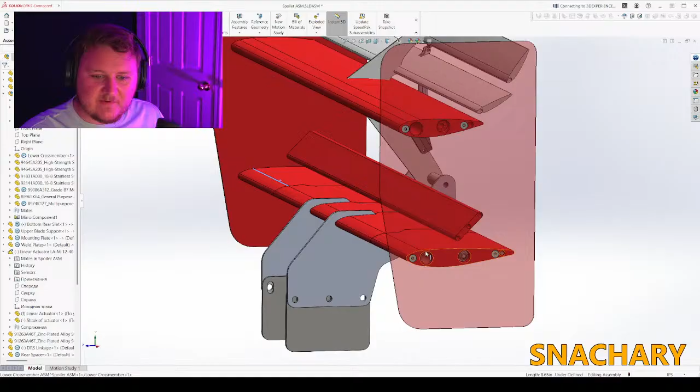Like I said, we proved out the 3D printing concept along the bottom section. I've already printed the bottom section in PLA, and I'm gonna print it in PETG carbon fiber. As far as the CAD goes, I need to adapt the sectioning that'll allow us to print it on the Bambu Lab to all the other cross members, and then work on some features for the side plates, the holes on those panels.

But we're moving right along. So I did a little screen record of all the features of the wing earlier, and I'm gonna send that off to Dylan at the Rad Factory, make sure we're going in the right direction.

But yeah man, this thing is sick. I hope he chooses the GPS option, because I was just getting into coding with ESP32, and I have these GPS modules I wanted to try. So what would happen is at a certain speed it would actuate on its own, and then when you slow down it would restore itself to that position.